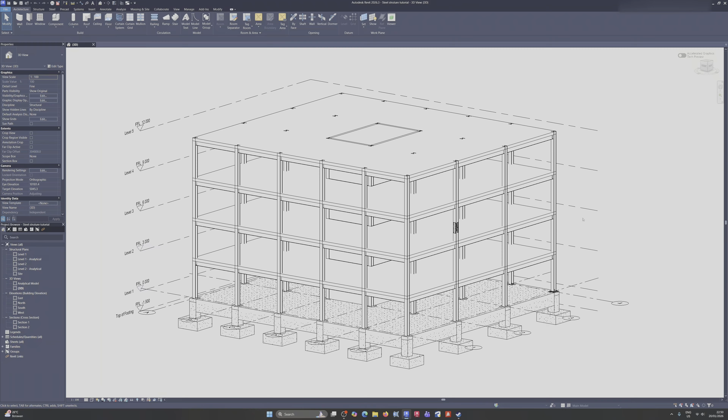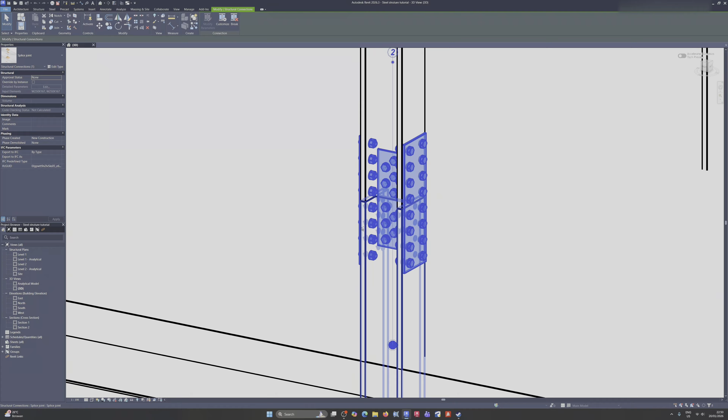Today I will show you how to model a column splice connection in Autodesk Revit. If you've been wondering how to connect two steel columns in Revit, this connection type will do the job. Essentially you'll have plates at the flanges of the columns and the web of the columns. So without further ado, let's get started.

Right now I have my structure here. What I'll do is delete this column and make it extend to level 3, for example, and extend the top level offset to 1 meter.

As is typical for column splices, it's easier to erect the structure when the joint is above the floor. So let's delete this column, apply an offset of 1000 at the base, and connect it to the very top.

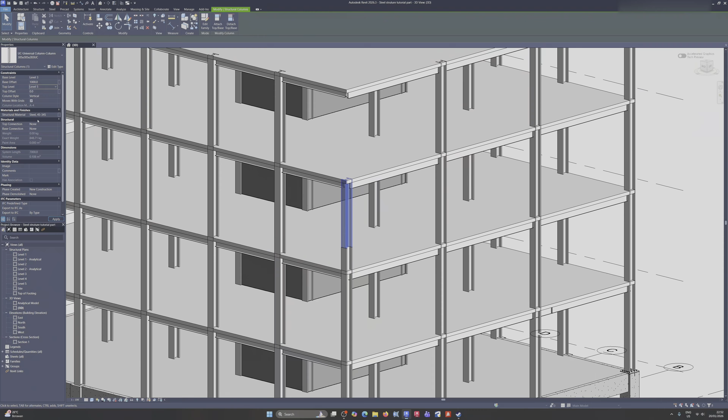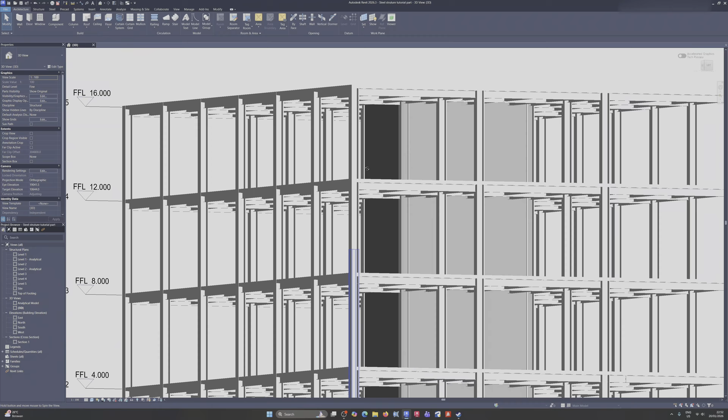So we've already set up the column exactly how we want. We have a 9-meter length and a remaining 7 meters, which is pretty standard for structural steels. In general, you'll deal with either 6 or 12 meters, depending on your site, whether you can erect 12 meters directly up. In this case, if our building is 16 meters, we'll definitely need a splice anyhow.

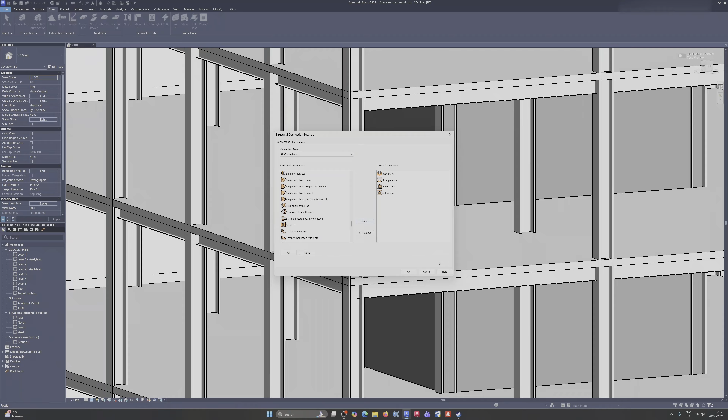So enough rambling about that. Let's proceed to the steel tab, click on connection settings, and let's look for splice. Look for the S section - splice, splice joint right over here. Click on it, click add, and click OK.

Go to the connection button and select the splice joint. Select this column, hold down Control, left click on the other one, hit enter, and Revit will do its magic. So that's pretty much it, really - the splice joint.

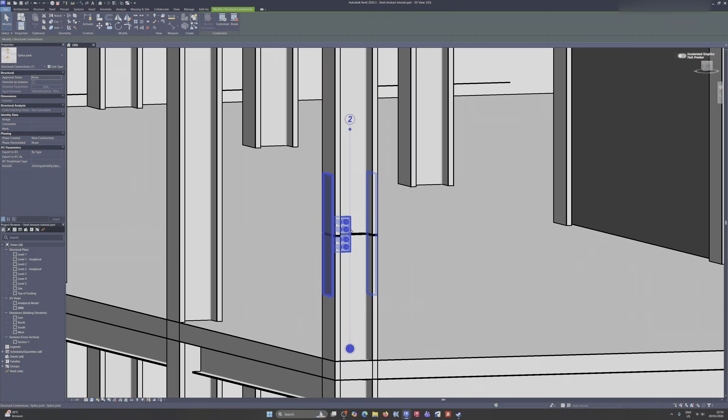Now let's proceed to editing this connection. Click on edit type, click on edit modify parameters, and you'll be greeted with this 3D view of the connection itself, with the general tab, web, flange top, and flange bottom.

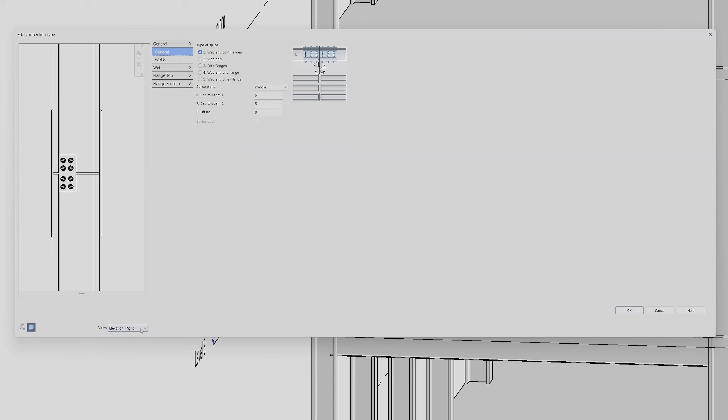Let's quickly proceed to a view that's useful for us, one that shows the web. Click on this drop down, which is a faster way of doing things - click on elevation left or elevation right, you can't go wrong with either. If you want the front view, just click on front and back, for example.

One thing to note is that you cannot really rotate in this view selection - you can only rotate once you are in the 3D view. And of course, you have your plan view over here. That's something neat to know if you are detailing in Revit, this view drop down can help you very much.

So let's proceed to the detailing. Let's head to the general tab. Essentially, your splice can be done for both web and both flanges, or web only, flanges only, web and one flange, or web and the other flange. In this case, we'll be doing both flanges and the web, so the splice plane is in the middle.

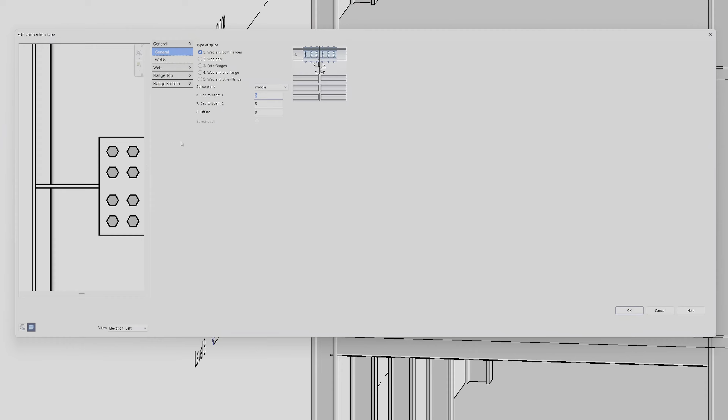You don't really need to set anything else here other than adjusting the gap. Right now we have a 5mm gap between the two, so let's say 2mm is more than enough already, so that we can weld it, for example. Essentially this offset just affects where the joint level is, so we don't really need to play around with that.

Let's head to the weld section. Here you have the top flange plates - you can see these marks indicating welds, and these are the weld thicknesses, 4mm, workshop or site, you can adjust them yourself. I'll just leave it as is for now, and if you're still confused where the welds are located, you can refer to this diagram.

Let's move on to the web section. In the web drop down, let's click on web plates. Right now we have two plates, one on the left and one on the right. You can, for example, keep the plate on the left side only or the right side only, but in this case we'll keep it as both.

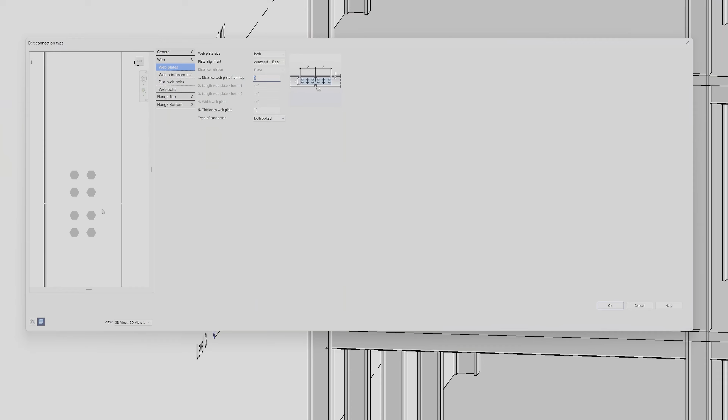For plate alignment, you can play around with these settings, but honestly I'd rather just stick to one and adjust it to whatever I need. Let's proceed to setting 1, which will affect the distance of the plate from the edge. If you key in 0, it'll be pretty much in the middle of the column, so we can just leave it at that.

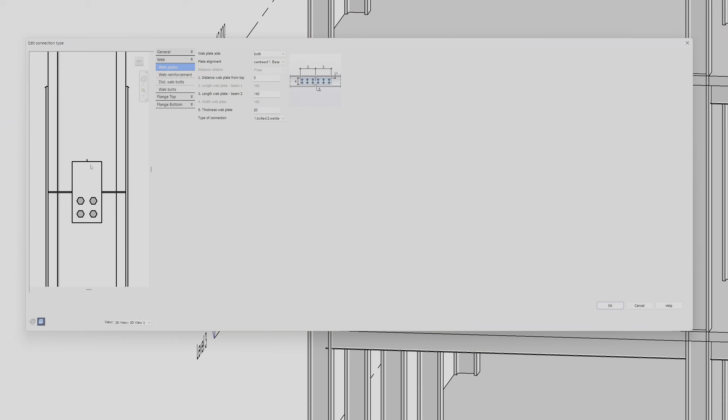You can adjust the thickness of the plate, so let's key in a 3/4 inch plate or 20mm. Essentially what you can do here is both bolted, or one welded and one bolted, or the other way around, where the top column is welded or both welded. In this case, I'll show you how to do the bolted option.

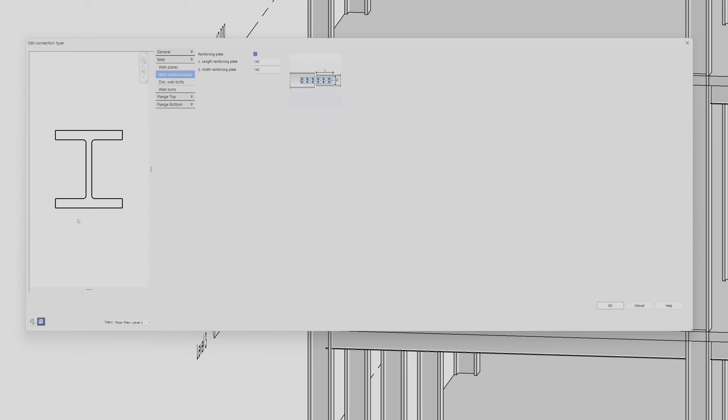You can optionally add a reinforcing plate here, but in all honesty, I don't see anything happening - even the plan view doesn't show anything. So right now, let's play around with this number here.

We don't see anything over here, so it's safe to say you don't exactly need any of these settings for this tutorial.

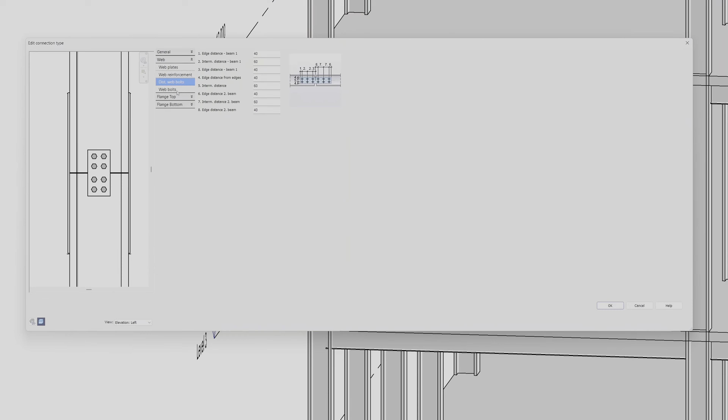The most important thing for the web plate is the distance of the bolts and the type of bolts you're using. For example, you can use an A325 structural bolt or A490 — let's use A490 for this case, with a 1-inch diameter bolt. Let's set it to a nut and 2 washers.

You can adjust the number of columns. If you key in 3 over here, you'll have 3 columns. The same over here — if you adjust it and key in 3, you'll have 3 rows. And over here, if you key in 3, you'll have 3 columns. That's how it works.

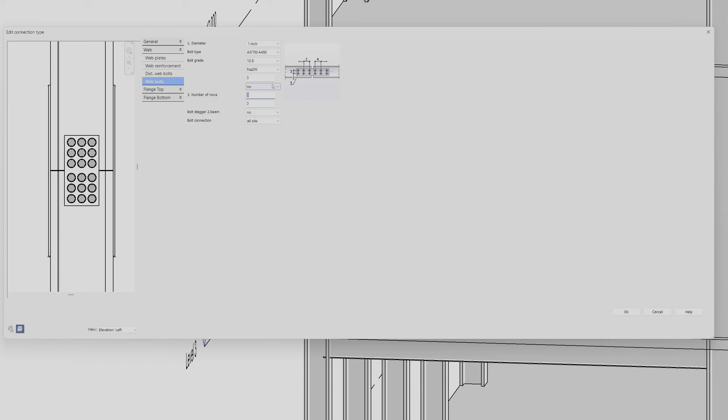If you're looking to have staggered bolting arrangements, you can play around with these settings to get what you're looking for. For example, you can do it like this, or you can do it like this.

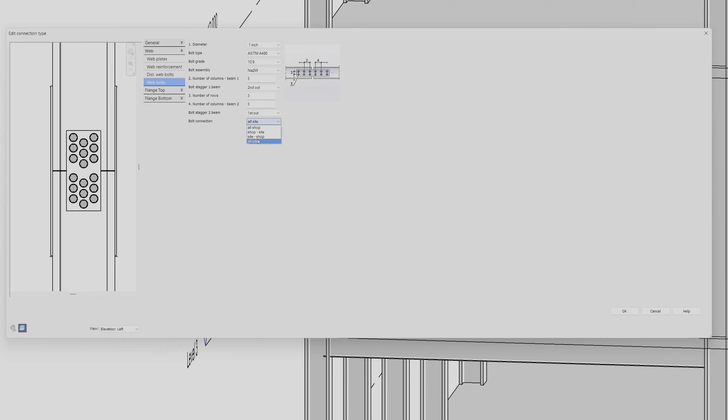For the bolt connection, you can choose all site, site and shop, shop site, or all shop. Let's just leave it at all site, and let's proceed to the distance detailing for our bolts — keeping a minimum of 2 inches, or roughly 50mm, of distance from the edges.

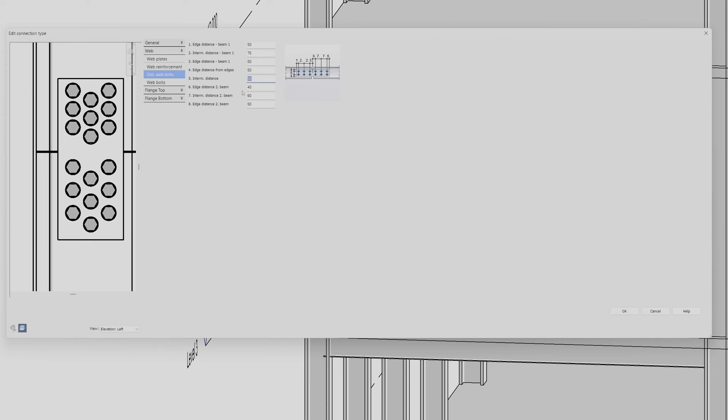Let's say 75mm or 3-inch spacing is sufficient. That's pretty much it for the settings of the web splice — let's move on to the flange.

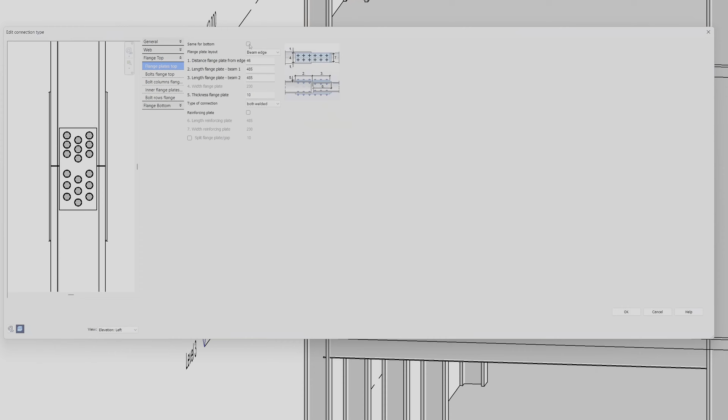If you already check on this option, everything else will be grayed out. If you want the bottom flange of the column to be different from the upper one, you can uncheck this box, but let's just check it since it's more convenient, and typically they're all the same between the two flanges.

One thing to note is you can choose different view options. You can choose wireframe, which lets you see through the plates and see where the bolts are. That's the usefulness of wireframe — you can check if you have anything potentially clashing, for example if you have holes that are in the way.

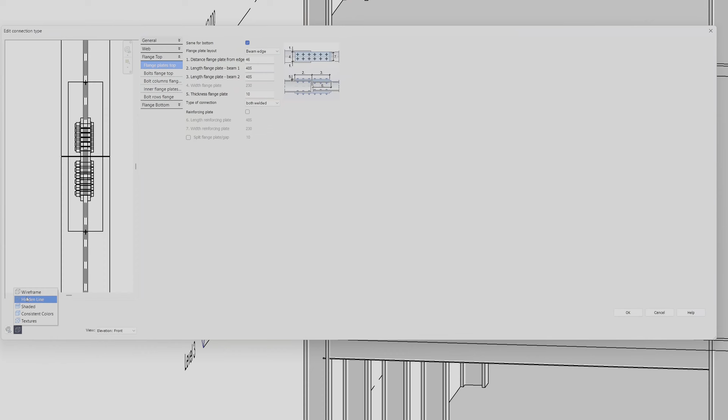Let's proceed to hidden line, and I'll keep it at beam edge instead of plate width — you can play around with plate width on your own. So let's play with this first figure here: the distance of the flange plate from the edge is 46 millimeters. You can put in 0, for example, so essentially the flange plates are right up to the edges of the column.

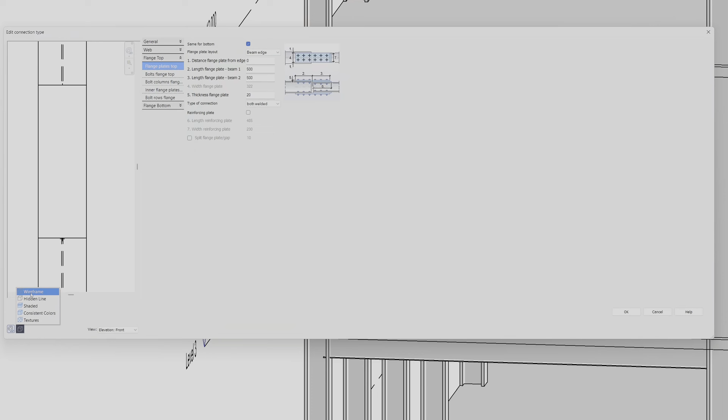You can adjust the lengths of the flange plates — make them both 50 centimeters each — and key in the thickness of the flange plates themselves, to 3/4 of an inch.

You can either have a welded setting or both bolted, for example. If you notice, right now when we choose the bolted option, you have this glitch with Revit — we'll fix it in a bit. So let's proceed to the bolts flange top.

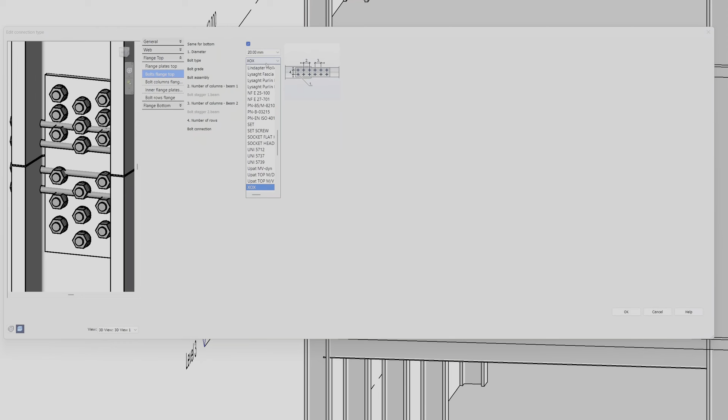Let's choose an A490 bolt over here, and as you can see, the glitch is gone. But if I were to change it to a 1-inch bolt, it will be back. So essentially, the way to fix this is to fix the spacing of the bolts themselves — we'll get to that soon enough.

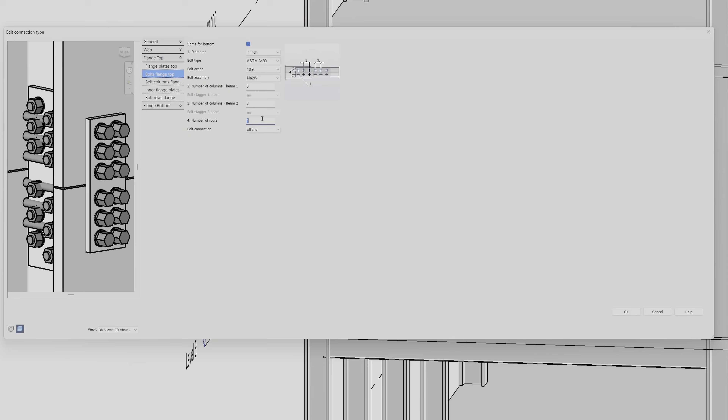Let's say you want 3 over here and 3 over here, and for the number of rows, you can have 2 rows, for example, or just 1. But let's say you have a need for 2.

Now let's play around with the dimensioning. Again, let's keep the distance between edges at least 2 inches here. Now that we've adjusted the spacing of our 1-inch bolts, let's proceed to a 3D view.

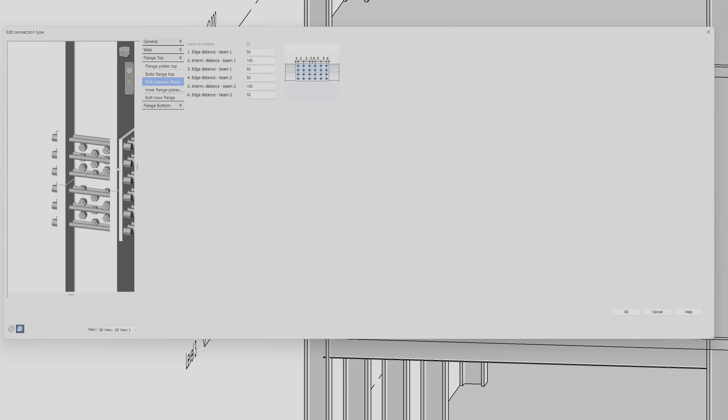So we still have this issue over here, so let's space things out even more. Let's do 75 and 75 over here. Okay, let's head to bolt rows over here and see if this one will adjust it.

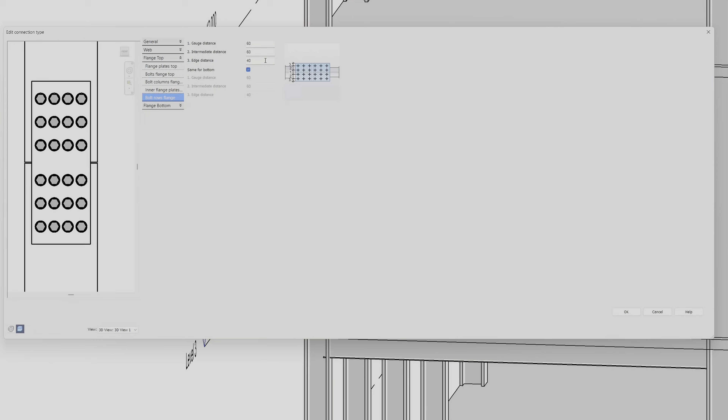So the gauge distance is the distance between these 2 center bolts. Let's play around to 4 inches over here, and that seems to do the trick.

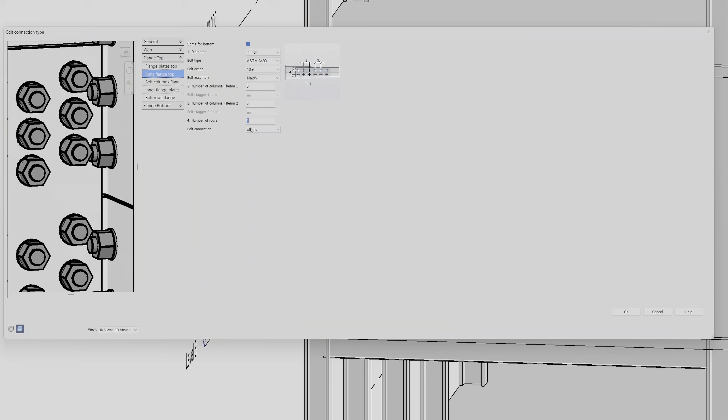But as you can see, we are having a clash over here — we have tolerances that are very, very tight, making it very difficult to install. So let's just get rid of this one and play around with this instead.

Let's make it 200, for example, like so. That makes it much easier for the fitters to install the bolts.

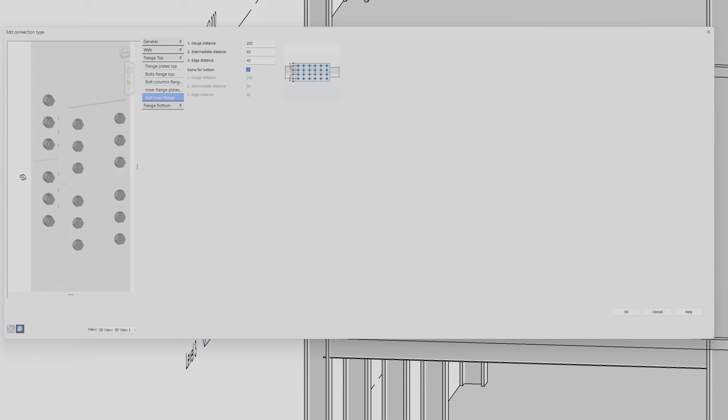So let's now play around with the intermediate distance over here. Actually, we can't do anything with the intermediate distance since we don't have another column over here, so that's pretty much moot.

Okay, so let's key in 60. Alright, so 60 seems to do the trick so that the additional splice plate at the flange is as wide as the column flange itself.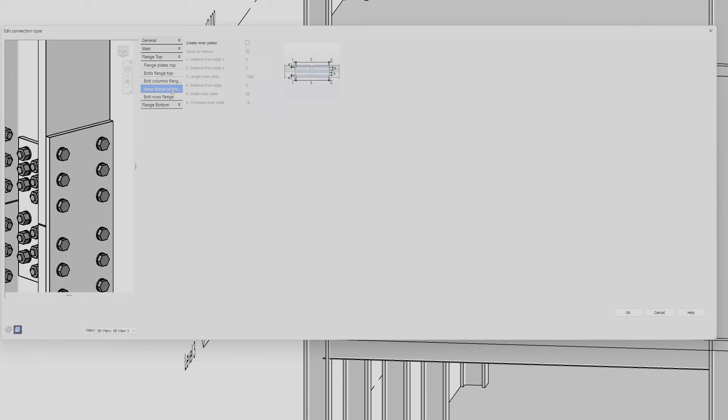Back to the inner flange plates tab — you can check on this if you want an additional plate, like so. But in general, we don't really need that unless you have some extreme load cases, for example. So let's keep it unchecked.

So that's pretty much it for column splice connections over here. Click on apply and okay.

So that's pretty much it for this tutorial on column splices in Autodesk Revit.